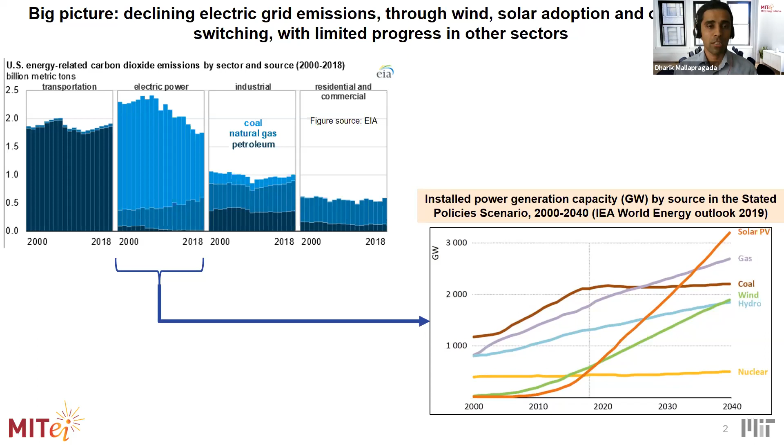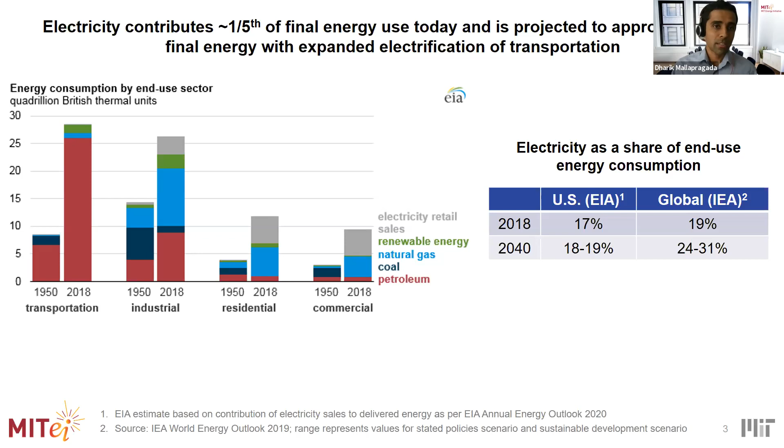So within this context is where hydrogen fits into the picture of larger decarbonization of the energy system. There's been a lot of interest in exploring how hydrogen and hydrogen-derived energy carriers could enable decarbonization of various applications in transportation, industrial, residential, and commercial sectors. Now, these sectors are very varied in their end-use applications, notably that many of these applications, such as in transportation, are highly distributed in nature, while in the industrial sectors, many of these applications will be centralized applications.

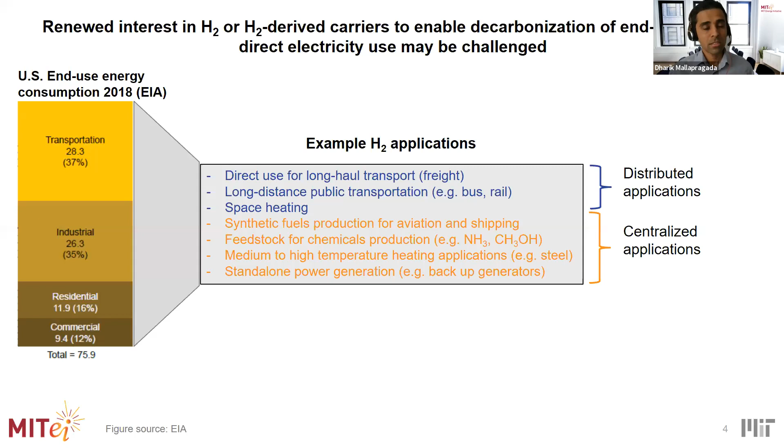So some examples I've highlighted here include long-haul transport for freight or passengers, which would be a distributed application. Residential space heating could be another distributed application, while in the industrial sector, providing both feedstocks, but also heat for various processes such as steel, as well as chemical manufacturing could represent large-scale centralized applications. So this is the story for hydrogen and the potential uses in all the other sectors outside power.

But it's also important to highlight that hydrogen could also play a significant role in the deep decarbonization of the power sector itself, particularly because of its ability to provide relatively cheap energy storage at relatively lower capital costs compared to known electrochemical technologies. So one configuration where hydrogen could interact with the electricity sector involves a system as shown here, where basically we have electrolyzers sourcing electricity from the grid to produce hydrogen that is compressed and then stored in either pressure vessels or in geological storage sites, which is already practiced today commercially.

And subsequently, during times of high electricity prices or relatively low wind or solar supply, the hydrogen could essentially be burnt in retrofitted combined cycle or open cycle power plants or fuel cell systems. This is a configuration that is being actively explored in many different jurisdictions. One other point to note here is that hydrogen, because of its versatility of use in many end-use sectors, the same infrastructure could also be linked up with other end users of hydrogen. And some of the examples I'll talk about in our own analysis highlight that there is significant value to thinking of this sector coupling.

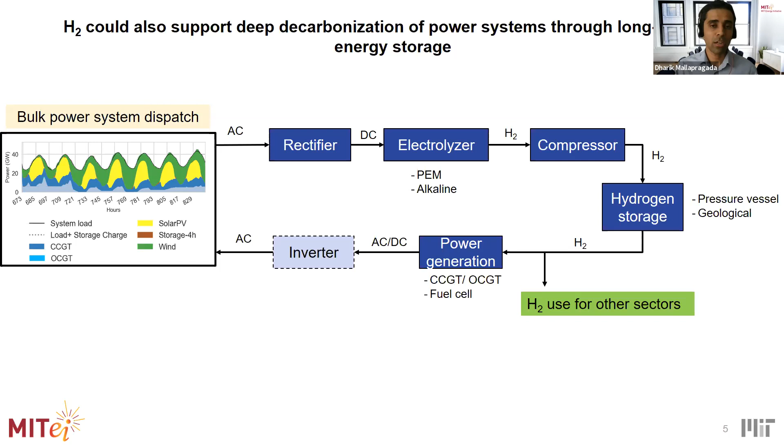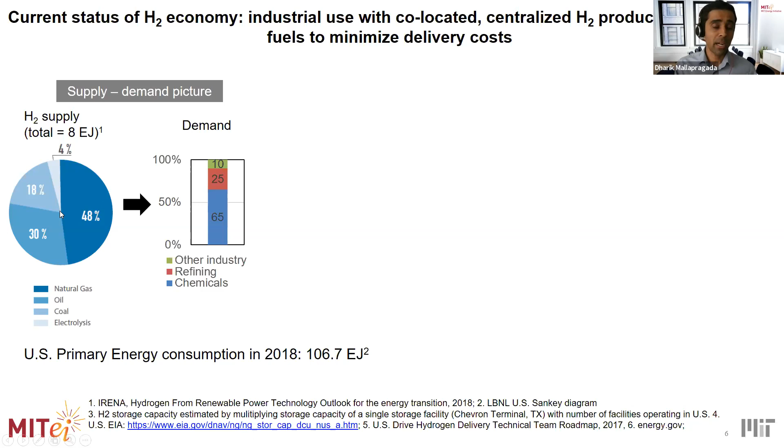And more importantly, nearly all of that hydrogen comes from conversion of fossil fuels, with natural gas-based reforming being the dominant technology, both globally, but also primarily in the US. So this is the supply demand picture. Another challenge with hydrogen, especially if you think about distributed end users with respect to where we are today, is that there's relatively little infrastructure for its storage and transport, especially when you think about the scale of the energy system and the other energy infrastructure that is available today for petroleum and natural gas.

So this suggests to us that although there is a significant vision and opportunity for thinking about hydrogen in a low carbon energy system, there are significant barriers as well from an infrastructure standpoint, as well as identifying low carbon hydrogen pathways that are scalable and cost effective.

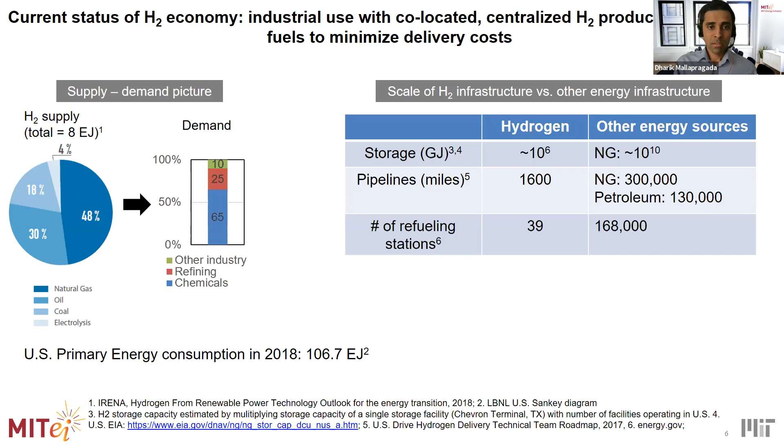So I'd like to just talk a little bit about some of those pathways of hydrogen production that could be potentially low carbon and also could be scaled to deploy in a future low carbon energy system. So today, as I mentioned, natural gas steam reforming is the dominant technology for hydrogen production. And in the absence of carbon capture, its levelized cost of hydrogen production is roughly around $1 to $2 a kg, depending on the cost of natural gas. This process is associated with CO2 emissions that are roughly 9 kilograms of CO2 per kilogram of hydrogen.

One can certainly do carbon capture and integrate it into a natural gas steam reforming process, and this has commercially been demonstrated with two sites operating with significant experience. And the costs again are going to be higher compared to a system that does not have carbon capture, and these costs vary depending on what you assume about the cost of natural gas as well as the cost of CO2 transportation and storage. In this type of a system, you get typically anywhere between 60 to 90% of CO2 capture, depending on the configuration that's deployed. So as compared to these approaches, there are several other strategies that are being considered with respect to low carbon natural gas based hydrogen production.

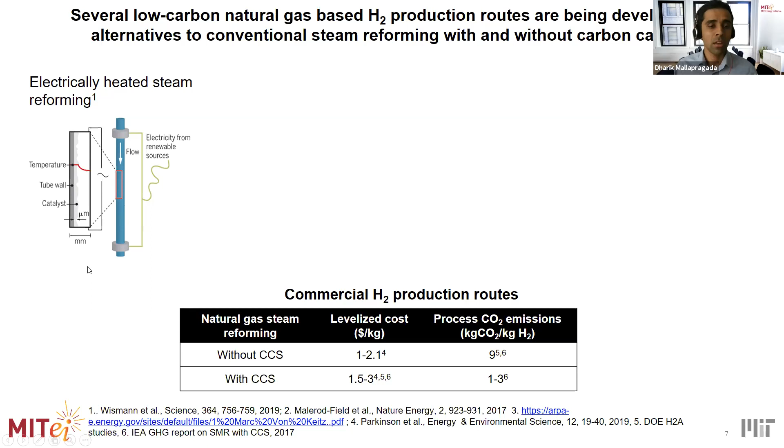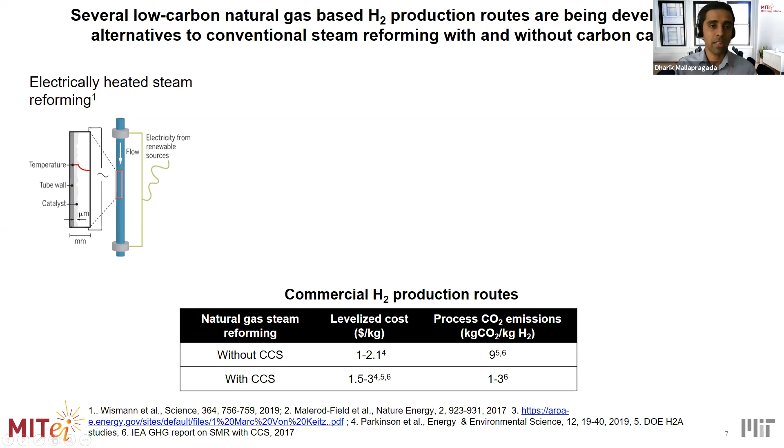So one of them, which potentially is a near-term strategy, involves increased use of electricity in the steam reforming process by substitution of natural gas combustion for process heat with electricity use for the reforming process. So a paper a few years ago demonstrated this both through modeling and laboratory work to show that not only does the system result in a more compact reactor system with better flexibility that can integrate with the electricity grid, but it can also potentially exploit the benefits of emissions reduction that we're seeing in the electric power sector.

A little lower technology readiness level option involves integrating the reforming process with the carbon capture process using a membrane reactor system where electricity and methane are provided as the energy source. This allows us to run the system at a low operating temperature while also potentially producing a pure CO2 product in the process. So this is work from CoorsTek that potentially could be an interesting pathway for low carbon hydrogen production.

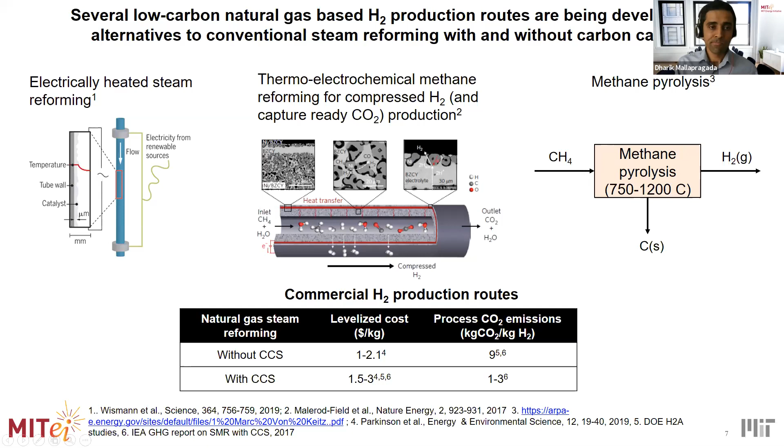A third approach that has gained some interest more recently is based around methane pyrolysis, where you think about high temperature decomposition of methane to produce hydrogen, and instead of producing gaseous carbon in the form of CO2, the process would produce solid carbon that could have immense value depending on the state of that carbon in reinforcement applications. So some of these technologies could potentially be available in the near term, notably the electrically heated steam reforming options, while the other two options of thermoelectrochemical reforming and methane pyrolysis are still relatively early stage technologies.

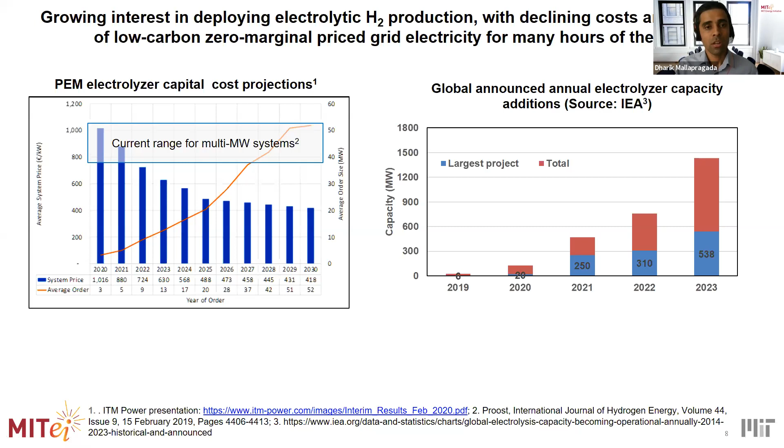So the first study I'll talk about is a topic looking into the use of hydrogen in the industrial sector, and it particularly focuses on evaluating the cost effectiveness of industrial scale hydrogen supply from renewable electrolysis coupled with storage. This work has recently been published in Cell Reports Physical Science. The main motivation of this work is trying to understand what are the opportunities for electrolytic hydrogen to be used for industrial scale hydrogen demand.

This industrial scale hydrogen demand has significant potential for growth, as we discussed in the previous slides, owing to opportunities for expanded decarbonization of this sector. One estimate from the National Renewable Energy Lab as part of their Hydrogen at Scale analysis puts this number at 5 times the current demand levels. So with this interest in mind, the study wanted to look at what is the opportunity for electrolysis to play a role in this new demand that might emerge from the industrial sector.

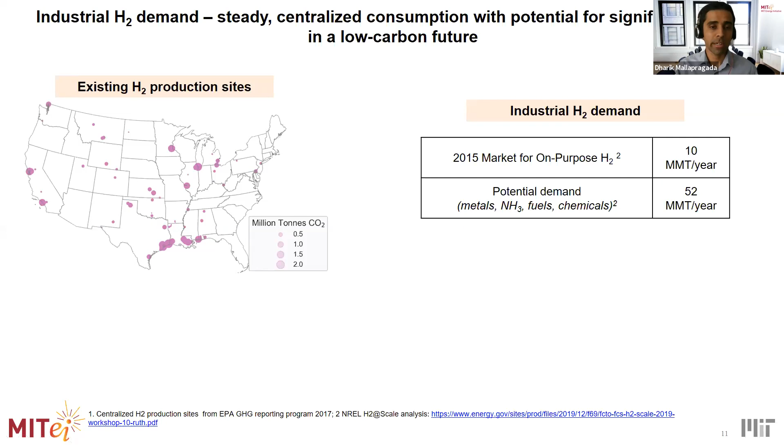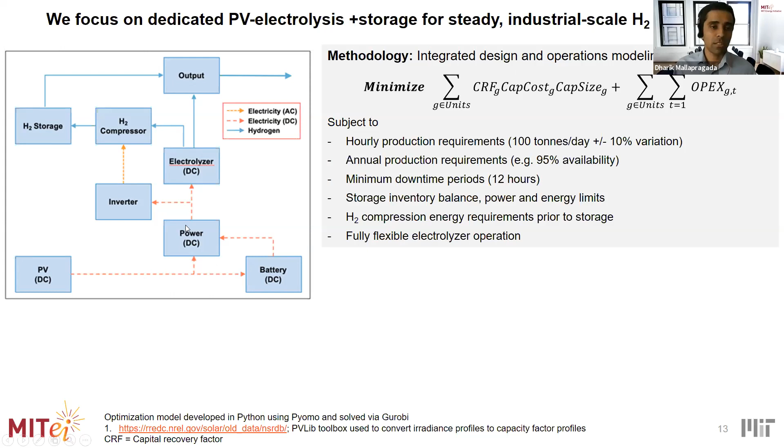It's important to note that these types of applications are primarily CapEx driven in terms of their costs, and therefore sizing of these equipment becomes a critical factor. So we did this analysis for a range of different locations spanning the continental US, looking at variations in PV resources for a single axis horizontally oriented tracking system.

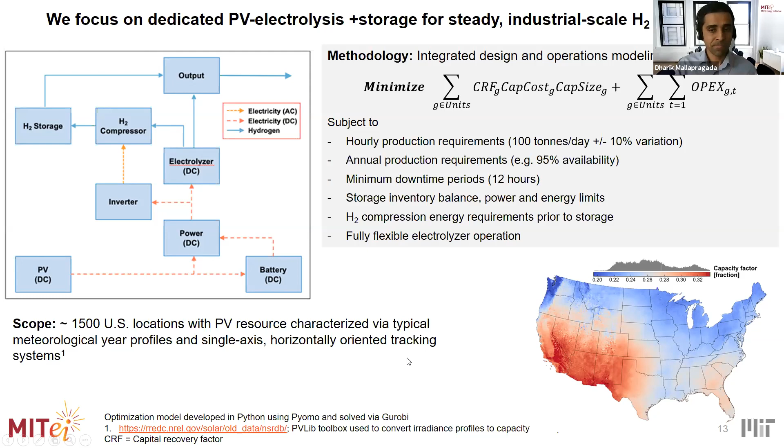And this makes sense because basically your peak PV availability is only available for around 100 hours of the year typically. And so in terms of capacity utilization of your electrolyzer, it is cost optimal to size it to be much smaller than your PV system and curtail that excess electricity.

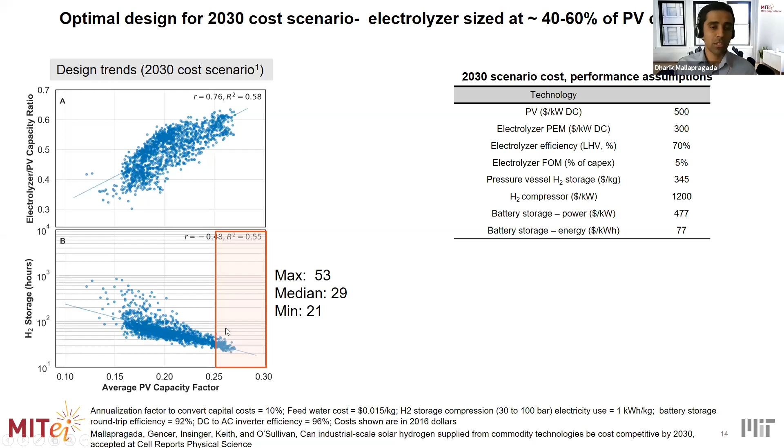So what you see at the site with the largest storage requirements for PV capacity factors greater than 25% is that there is a larger variation between winter and summer capacity factors. And that is one of the reasons that explains the large variation in storage inventory levels and the need for more storage in these types of systems.

In contrast, the location with the lowest hydrogen storage capacity tends to have relatively flat storage inventory levels and a lower variation between winter capacity factors and summer capacity factors. This location is in West Texas, whereas the location with the maximum storage requirement is in Southern California, but in the western part of the state. So you get different sort of resource quality in both of these regions that again influences the choice of design of the system that ultimately has an impact on the cost of the system.

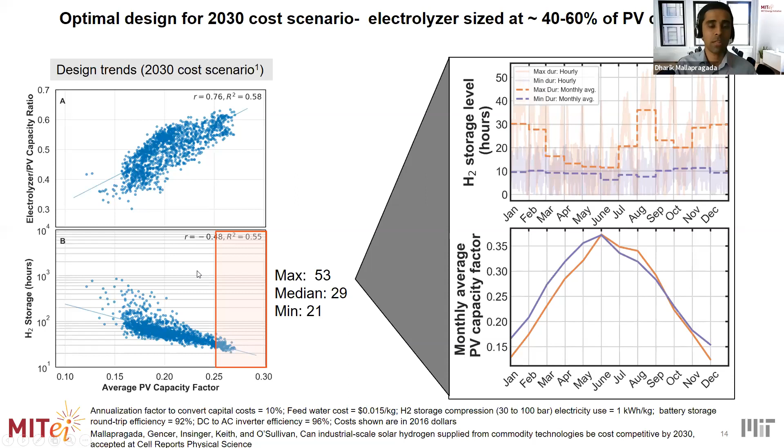But you also see that some of the best or the lowest cost regions tend to overlap quite well with existing hydrogen production sites, which are marked in the pink here. So these are indicative of potential opportunities for near-term deployment of this type of an approach, whereby you already have an existing hydrogen demand, and this type of a low carbon hydrogen production pathway could be integrated to meet that hydrogen demand.

So we'll focus a little bit on some of the sensitivities of hydrogen production costs and the key drivers for these costs at some of these best sites in the next few slides.

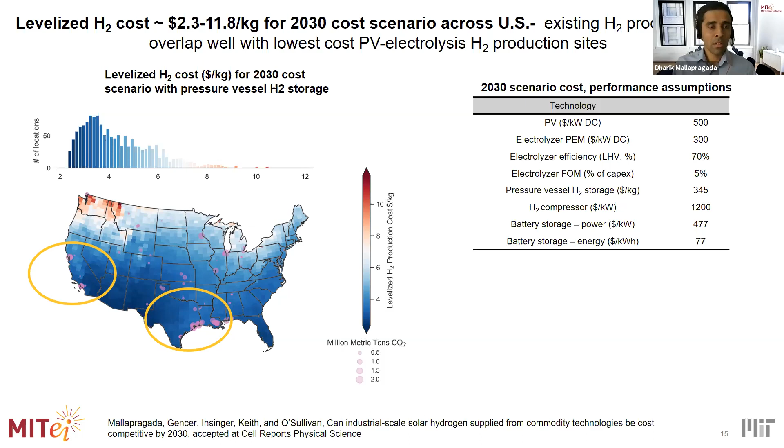So locations, again, where you see that PV resource is similar could have vastly different costs owing to the intertemporal nature and PV availability. And you might need more PV capacity in one location to manage that intertemporal variability.

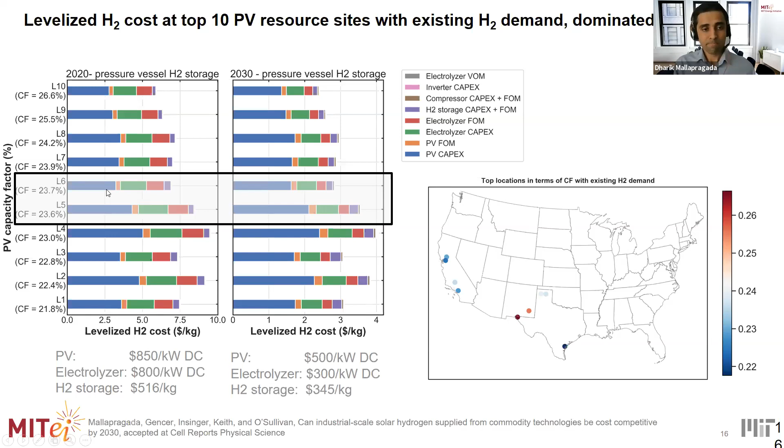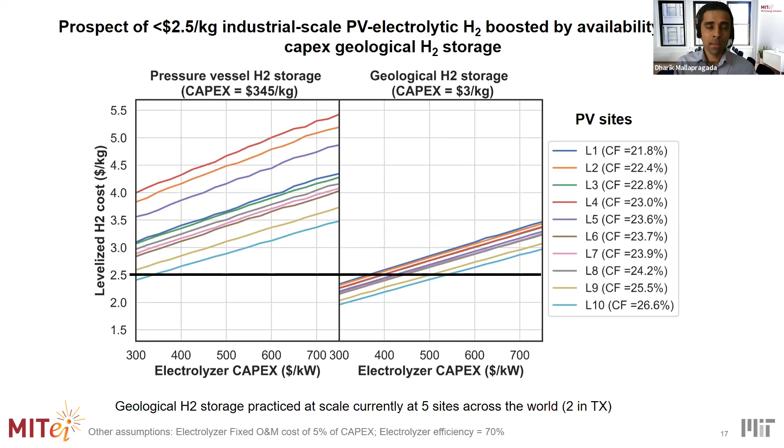So I'm going to take the next few minutes to quickly pivot to another research topic that looks now broadly at the use of hydrogen across multiple sectors. So the previous presentation focused largely on the role of hydrogen for supplying energy for one particular sector, the industrial sector, in a standalone mode. But in many applications, hydrogen use could be distributed in nature and also could be interacting extensively with other infrastructure that's already in the system, notably the electricity system. So these sectoral interactions become important to capture as we start to think about the value proposition that exists for hydrogen across all of these sectors, but also in balancing renewables in the power sector.

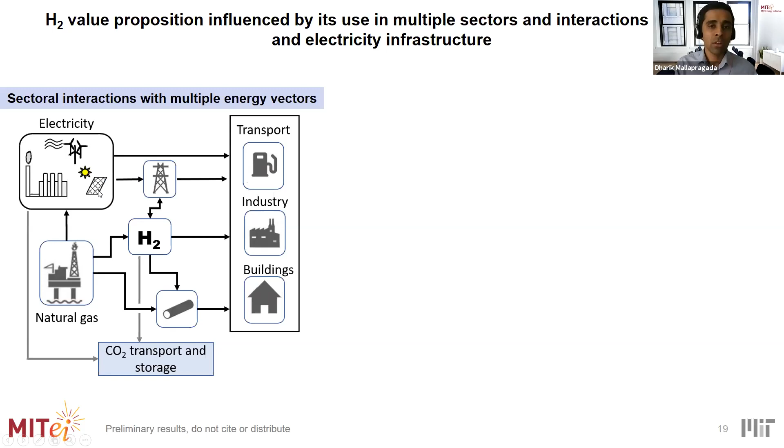So some of the questions that these types of integrated sector analysis could answer is identifying least cost infrastructure outcomes that help to decarbonize more than one sector, identifying where natural gas might find the most value as we transition to a low carbon energy system, and also trying to understand some of the interaction effects just within the hydrogen supply chain, both in terms of the choice of production technology as well as the mode of hydrogen transportation or storage infrastructure that is selected.

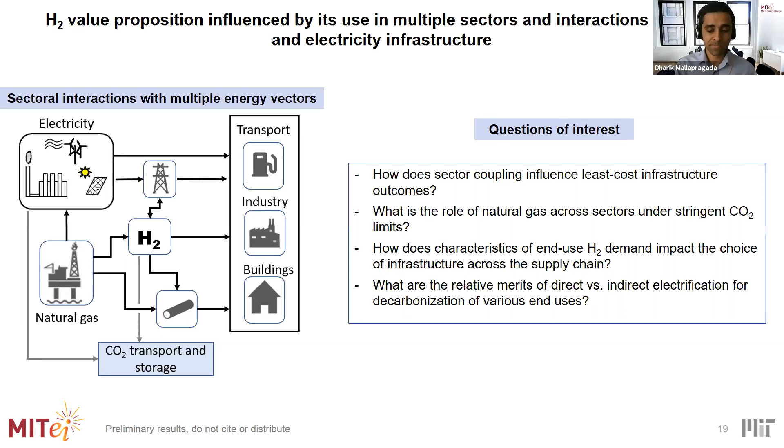So the work we did focused initially on a case study where we're trying to understand the interactions primarily between the electricity system and a future hydrogen infrastructure system, where we are focused on two major interaction opportunities: the option of using power for hydrogen production and the potential for using hydrogen to supply dispatchable power to balance renewables in a low carbon system. In this type of a framework, we, for our initial analysis, have parameterized the availability of gas infrastructure and CO2 infrastructure in terms of input cost assumptions for both of these feeds and sinks. And we are primarily looking at hydrogen use in the transportation sector as a starting source of hydrogen demand.

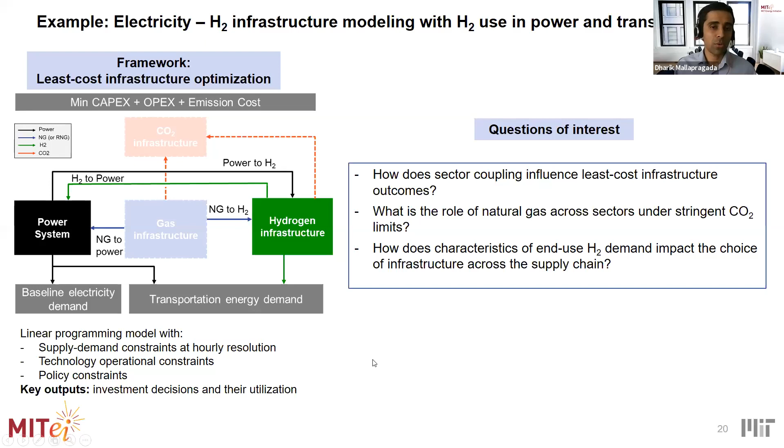So this is a least cost infrastructure framework that we've developed, which is basically a linear programming model at this point that considers supply and demand constraints at an hourly resolution across both these sectors, technology operating constraints, as well as policy constraints regarding emissions reduction. And what we get at the end of this type of a framework are insights regarding optimal investment decisions and their utilizations across the sectors.

So we looked at a case study of the US Northeast, where we have estimated hydrogen demand based on 20% fuel cell electric vehicle penetration using historical gasoline consumption data. Within this case study, we consider a range of technologies for power generation as well as hydrogen production. We also consider a range of technologies for hydrogen transportation, either as liquid or gaseous trucks, hydrogen pipelines, and look at its competition with electric transmission as the mode of energy transport. We consider energy storage availability, both in terms of hydro resources in this region, domestic and imported, as well as the option of deploying batteries or pressurized hydrogen storage at various locations.

And to account for the hour-to-hour operations of the system, we are modeling the operations of the system over 30 representative weeks that are selected from historical weather data to represent the variability that one might see over the course of a year.

There are a number of different assumptions that go into any type of model like this, and I'll just highlight a couple of them. The electricity load that we're assuming here is for a 2050 scenario based on the NREL Electrification Futures Study, and we're considering, as I mentioned earlier, hydrogen demand of approximately 1 million tons per year, which is approximately representative of 20% fuel cell electric vehicle penetration in both light duty and heavy duty applications.

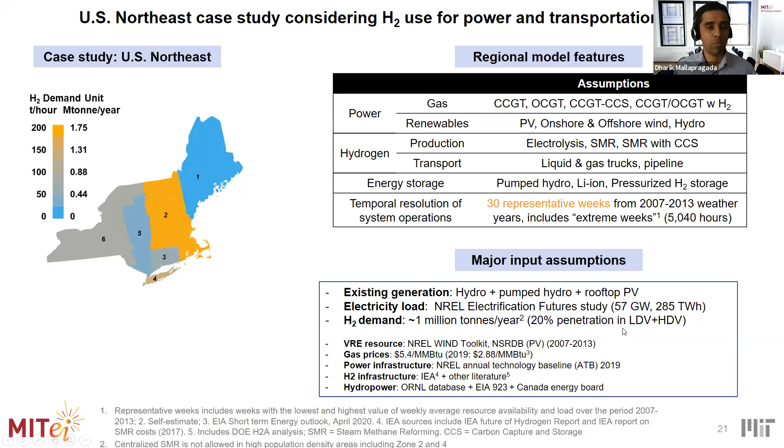What we see is that at basically no carbon price scenario, the current cost of natural gas makes it the dominant source of hydrogen production. And even if we have cost reductions in electrolyzers, there's relatively little penetration of electrolysis in the system. This is partly driven by the competitiveness of natural gas, but also the fact that the electricity sector does see large adoption of wind and solar in terms of capacity, but there just aren't that many hours of low carbon electricity supply to justify the use of electrolysis for hydrogen production.

However, if we introduce a small carbon price of say $50 a ton, then what we see is that the system starts to shift away from traditional natural gas reforming to natural gas reforming with carbon capture for hydrogen production. And if you look at scenarios where electrolyzer costs come down to roughly half of what they are today, then you could see a scenario where about 30 to 40% of hydrogen supply could come from electrolysis. More importantly, you also see that with a small carbon price, you're significantly increasing the amount of wind and solar penetration across both of these systems.

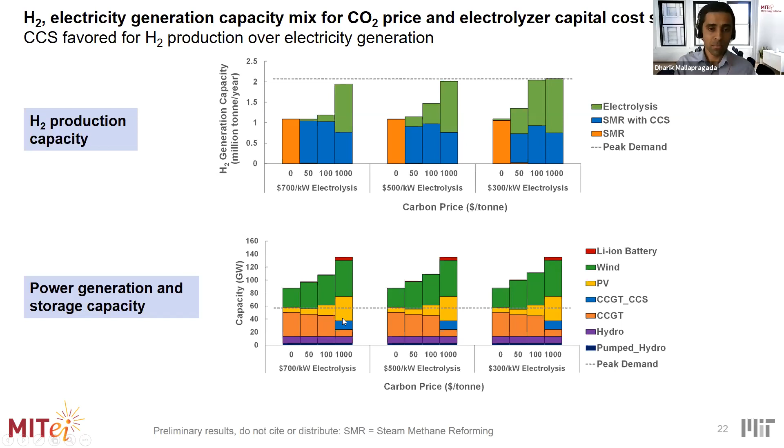Here again, the preference to use hydrogen storage as the predominant mode of energy storage in the system stems from its lower energy capital cost, and the hydrogen storage proportion continues to increase as we go to lower electrolyzer costs, which is indicative of the fact that the flexibility in electrolyzer operations requires additional hydrogen storage to supplement it, and results in electrolytic hydrogen plus hydrogen storage outperforming the need for CCS-based technologies or other types of energy storage in the power sector.

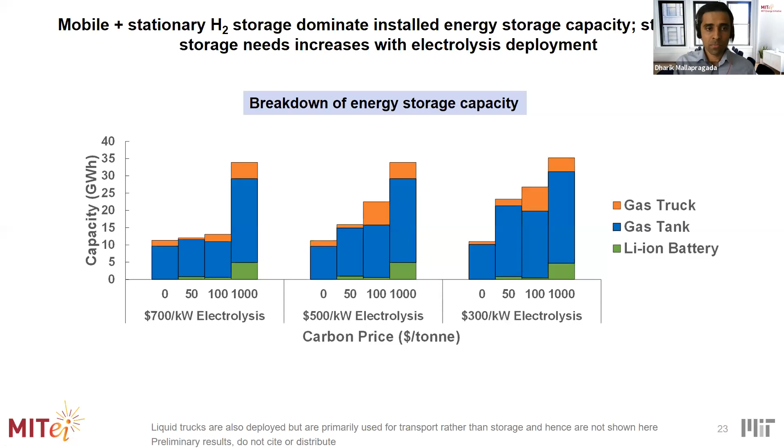consistently across the different hydrogen demand scenarios, we see that the coupled approach basically leads to greater integration of renewables in the system, which stems from the fact that the availability of an electrolyzer load that is flexible in nature and can be supplemented with hydrogen storage allows for greater integration of renewables in the power sector.

And this increase in renewables comes at the expense of reduced requirements for battery storage, but also dispatchable power generation in the form of combined cycles with and without CCS. As we increase the nature of this hydrogen demand, the nature of the coupling between the two sectors increases. And so you see the effect of this coupling showing up at much lower carbon prices as well.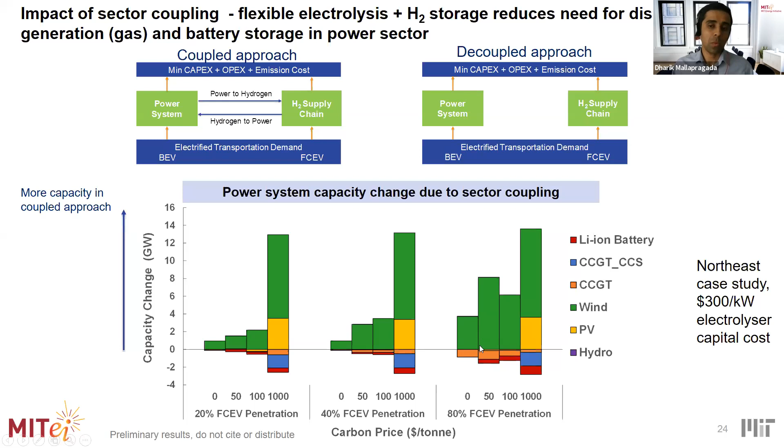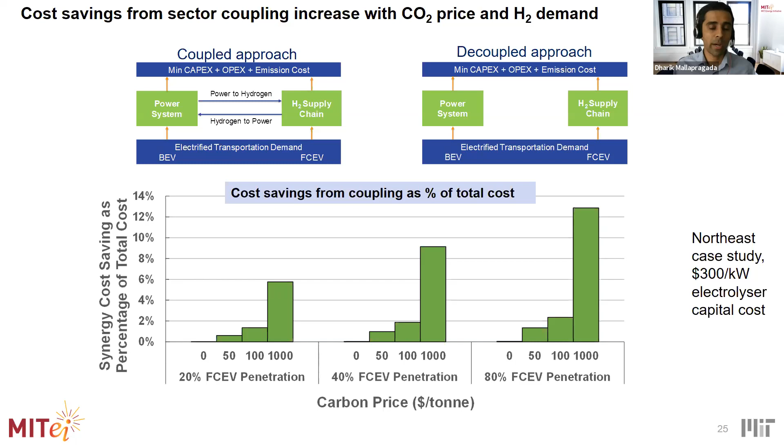We also see, similar to this, savings on the emissions of the overall system, where essentially having a small hydrogen demand leads to greater emissions reduction in the power sector compared to not having that hydrogen demand because of the flexibility that electrolysis provides to the system in integrating more renewables.

Finally, I'd like to talk a little bit about the insights we have learned regarding the hydrogen infrastructure and its interactions with the choice of hydrogen production modes. So here I'm focusing on two particular scenarios that we have talked about previously. One is a scenario where electrolyzers are very expensive and we don't have a carbon price. So essentially the dominant mode of hydrogen production is natural gas reforming. And then another scenario is where we're looking at electrolysis being the dominant mode of hydrogen supply.

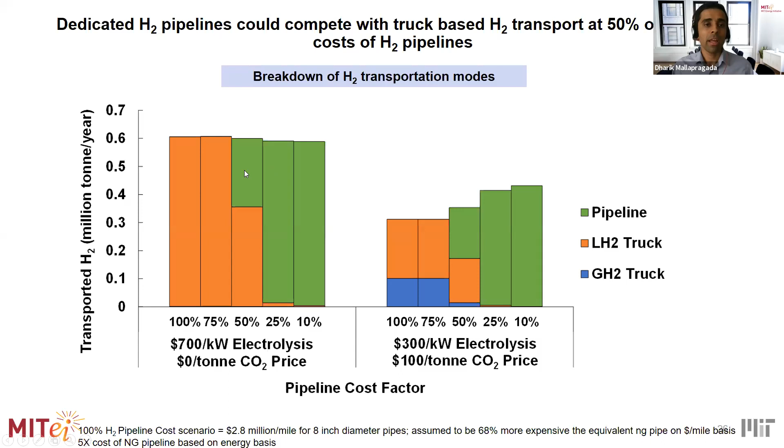However, as you start decreasing your hydrogen pipeline costs from the baseline level of 100% to about 50%, we start to see pipelines emerging at about 50% of their baseline costs for both of these systems. This suggests that potentially, strategies for retrofitting existing natural gas infrastructure and natural gas pipelines that could meet this cost threshold could be a competitive option for long-term hydrogen transport.

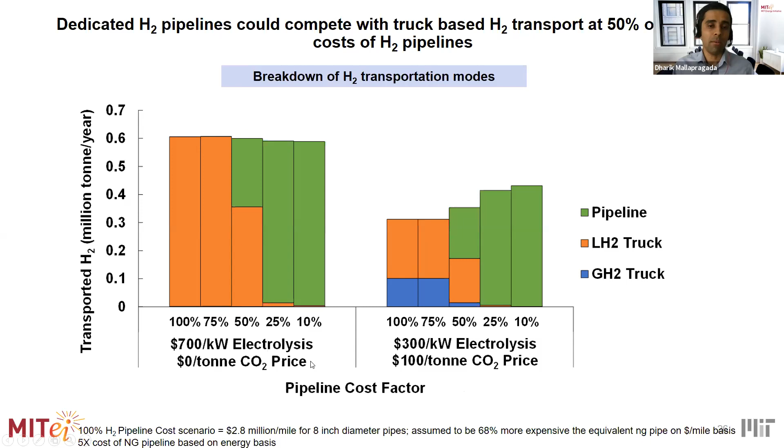Another point to note here is that the mode that involves natural gas reforming tends to involve an infrastructure layout where hydrogen is produced at centralized locations and transported a lot more compared to a mode that primarily relies on electrolysis, where the overall amount of hydrogen transported is smaller than the mode in which you're relying completely on centralized technology. So this suggests to us that the choice of hydrogen infrastructure is also intricately tied to the types of hydrogen production pathways that are selected for meeting these various end use sectors.

So this is just a flavor of some of the analysis that we have been doing. I'd like to highlight that this is a framework that can be readily adapted to consider a number of different further questions related to the role of hydrogen in a future low carbon energy system. And we'll be tackling these in the coming years, both at MIT and in collaboration with many of you on the call. So some of the opportunities here, in terms of technology development, relate to using a systems approach such as what I described here to understand the competitiveness of emerging technology pathways in production, storage, and transport.

Another compelling research exercise that we would like to undertake is to understand what are the opportunities for retrofitting gas infrastructure, and at what cost do they actually become competitive with building out new greenfield infrastructure for hydrogen movement. And finally, as we start to think about sector coupling, it's not just about power and transportation, but thinking about the aggregate view of hydrogen that has a key impact on its value proposition.

And one of the other aspects regarding hydrogen that is particularly important to consider is the costs associated with last mile distribution. And this framework could be easily adapted to think about the trade-offs between hydrogen infrastructure or electricity infrastructure for last mile distribution of energy for distributed end uses.

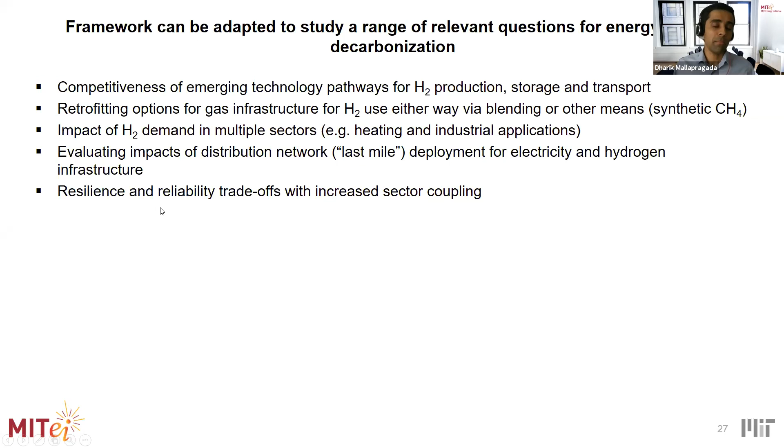And finally, as we think about a warming world and a low carbon energy system and trying to plan for infrastructure, while sector coupling does offer some cost savings, one has to be cognizant of the fact that those cost savings come at the expense of increased interdependence across these systems. So one really has to be thinking about not just the cost savings that come from reduced infrastructure layout, but also the resilience and reliability that might be impacted from this increased interdependence.

So with that, I just want to summarize some of the key takeaways that I had shared with you today. So we looked at these two particular case studies, one with industrial decarbonization, where we explored the prospect of renewable electrolytic hydrogen coupled with storage to be able to provide steady supply of hydrogen for the industrial sector. And the key takeaway here is that design matters in terms of how you size these various systems, and is very location dependent. And further, availability of geological hydrogen storage is really a key enabler to getting costs to be competitive in this sector and this particular application.

And then on the sector coupling aspect, the main takeaways are that there is really a role for natural gas primarily in the hydrogen production sector, even under moderate to high CO2 prices, and less so in the power sector. And the flexibility that electrolyzers coupled with hydrogen storage provide drive increased renewables penetration in the power sector and potentially could have an impact on the electrochemical storage needs in the electricity sector.

So with that, I'll stop, and I'm happy to answer questions that have probably come up in the chat. So I'll turn it over to you, Rob. Okay, thanks very much, Dharik. My goodness, there's a lot there to take in. And I'm sure there'll be lots of questions. I'm watching the Q&A tab, and I'll keep an eye on questions as they come in.

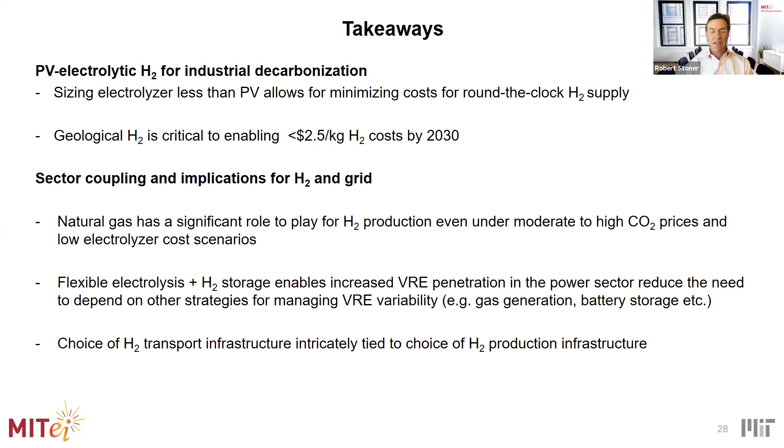But I guess there are a couple of surprises here for me. You just alluded to one, the viability of natural gas as a hydrogen source, even when you have to implement CCS. A relatively modest premium that looked from your initial numbers that it was maybe in the 50% range, maybe smaller than that in some cases. But I guess that depends on the overlap of production sites and CCS sites and pipelines and local concerns about storage. Is there really a strong overlap between those infrastructures at a large scale that would mean that that's a conclusion that we could draw very broadly?

So today, natural gas-based reforming is typically concentrated with petrochemical operations. And if you look at regions like Texas, there are significant sequestration sites in close proximity of where natural gas reforming occurs, that you could argue that is certainly a viable pathway. In the Northeast, potentially, one of the aspects that we didn't look at was to characterize the available CO2 sequestration, right? So I don't really have a definitive answer to say if that could be a showstopper.

But in general, the reason you see natural gas reforming with carbon capture being so competitive is that even with low cost electrolyzers, there are going to be times of the year when electricity prices are just high enough that it makes the availability of dispatchable hydrogen generation from a source like natural gas reforming that is also low carbon very competitive in the long term. So we'll be looking forward to your study of geological storage and future work on CCS to help make those economics clear. Sure.